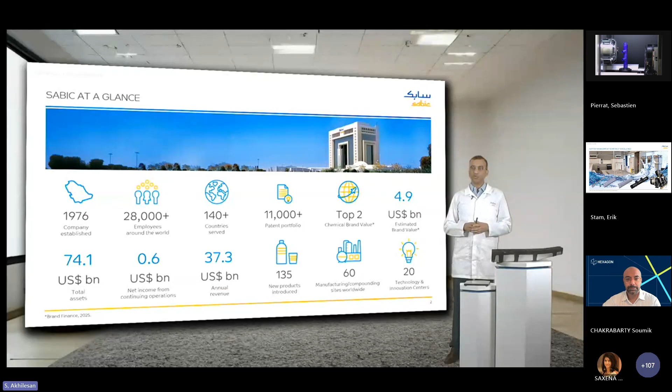Today, we are streaming live from 2 such technology and innovation centers in India and Netherlands.

In SABIC, we have 4 main business verticals: chemicals, polymers, specialties, and agri-nutrients. We are from the specialties vertical, where we deal with specialty engineered thermoplastics, specialty compounds, advanced composites, additive manufacturing, and thermosets and additives. In specialties, our key offerings include Ultem and Extem high-heat resins, Ultem sheet, Noryl resins, LNP compounds, as well as our extensive experience in application development and prototyping. The key industries that we serve include automotive, consumer products, electrical and electronics, as well as hygiene and healthcare.

Now, with this brief introduction, let's deep dive into today's technical topic. Today, we are going to talk about fiber-filled thermoplastics.

Fiber-filled thermoplastics are used widely in many applications in areas where the neat polymers cannot provide the required properties. This is achieved by having fillers such as glass fibers or carbon fibers to improve properties such as the structural stiffness and strength of the material.

Now, these materials are used widely in many applications, whether it's automotive, ignition coils, or maybe in the impeller for the water pump that you see at my hand here.

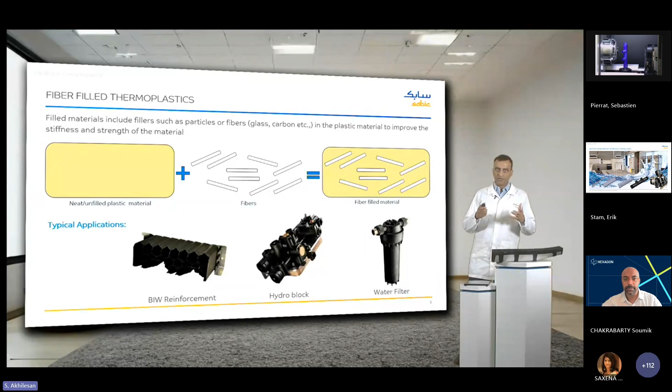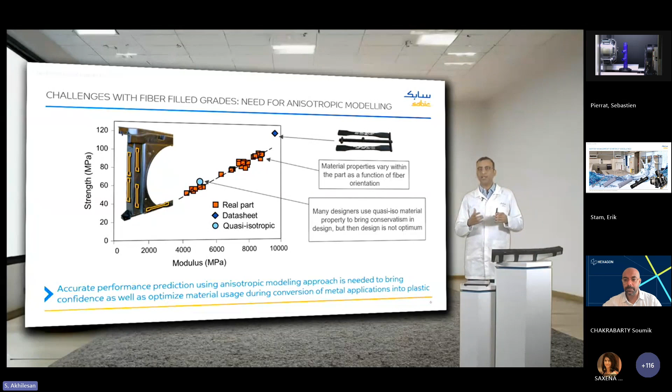So to avoid this scenario, what many designers in the industry do is use what we call the quasi-isotropic material property that is there in the blue circle. Now, this is a little better, that brings conservatism to the design, but then we are not really doing the optimal design. We are not taking care of the material that is there in our hand in an optimal fashion.

This can be explained a little better by this slide. What we show is that in this kind of applications and materials, if you are taking the technical datasheet value, for example for tensile scenarios, then you will be overestimating the stiffness or strength by 2x.

And similarly, for the fatigue case, the time to failure will be overestimated by 100 times, and the time to failure for creep will be overestimated by 400 times. So this really shows that we cannot use the technical datasheet values, they will be way off.

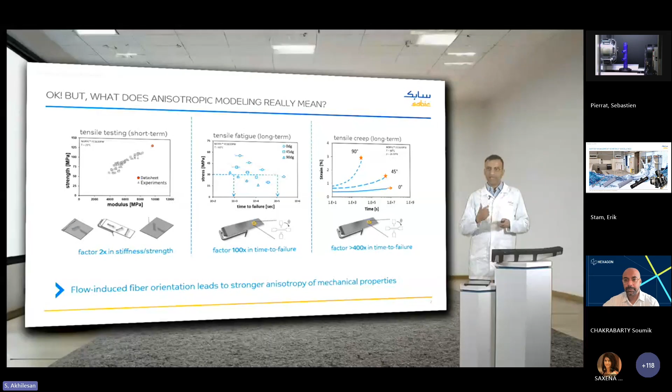And similarly, what I told in the last slide, if you use the quasi-isotropic properties, the design will not be optimal. So that really brings to the point that we should be using anisotropic simulation. Now, how do we use the anisotropic simulation?

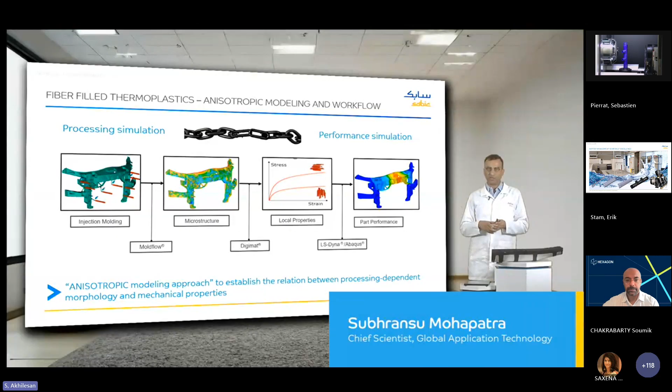In this case, it will require us to couple a processing simulation and then a performance simulation. The processing simulation, for example, if you are using injection molding as a process, then we have to carry out injection molding simulation using tools such as MoldFlow and MoldEx3D, where we can derive the microstructure such as fiber orientations.

And once we get the fiber orientations, then we can use the power of tools such as Digimat to assign the local properties at various points in the application. And once we have the local properties assigned, then we can do a full anisotropic simulation using tools such as LS-DYNA and Abaqus.

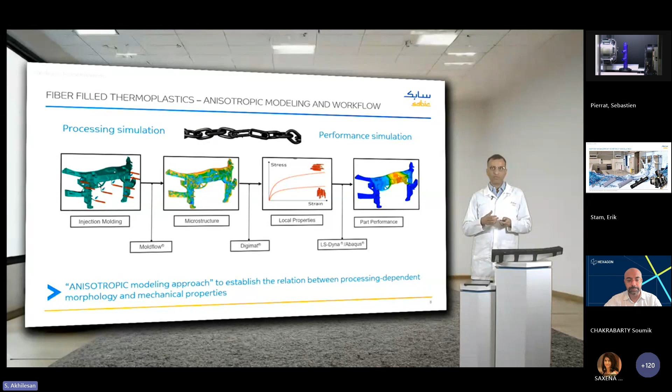And this simulation can actually be divided into 5 distinct steps, and that's how we are going to take our session today. As a first step, we have to do very extensive material testing and characterization, and that's what my colleague Vamsy from India will take you through.

And then it will require us to do a microstructure determination to know what are the fiber orientations in the actual part. And that's where the expertise from Sebastien, he will take us through that from Netherlands.

And then once we have that, we need to do the anisotropic modeling. And today, my colleague Prasad Dasappa from India, he will take this through for an advanced case of fatigue scenario.

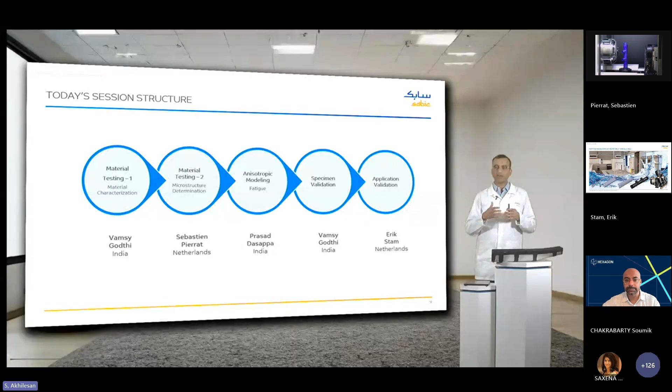And then once we have the detailed Digimat material card ready, we in SABIC go through an extensive range of validation. The first stage is specimen level validation, which Vamsy will take you through. Finally, we also do an application level validation, which our expert from Netherlands, Erik Stam, will take you through, to show how carefully and in depth we go to make sure the cards you get are trustworthy and accurate, and you can really rely on us. With this, I'll hand over to Vamsy to take you through the next section on material testing.

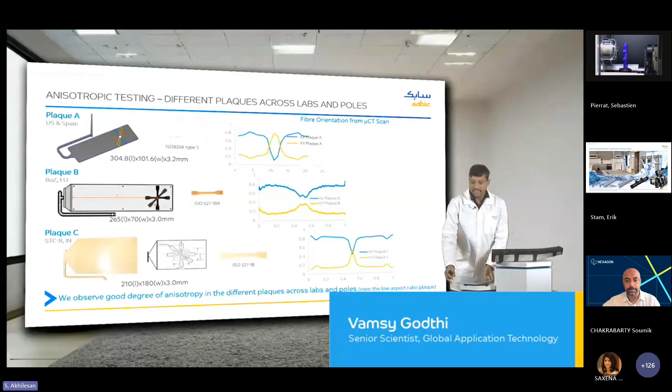Thank you, Subhranshu. Let's begin by looking at what it takes to characterize the anisotropic properties of fiber-filled thermoplastics. The process begins by injection molding a shear plaque. A shear plaque is a flat plaque, a 2D geometry with a gate at one end. We fill the part, and towards the end of the fill, we expect aligned fiber orientations in the direction of flow. This is the first step in the process.

There are different plaque geometries that different labs follow, as you can expect. You'll see different geometries shown on the screen. At SABIC, we make sure to study the anisotropy in any of these plaque geometries and ensure that at the locations where we cut the specimens and test the properties, the fiber alignment is well defined in the flow direction.

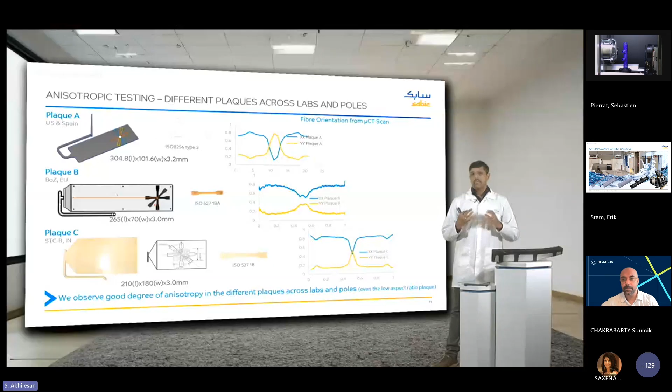That's the first step. Now let's take a look at the measures we need to take while carefully injection molding such shear plaques.

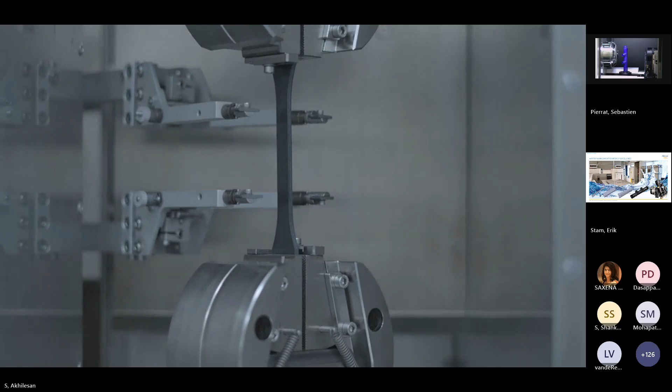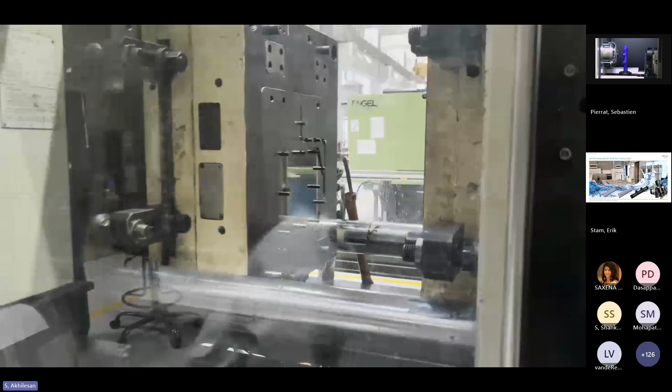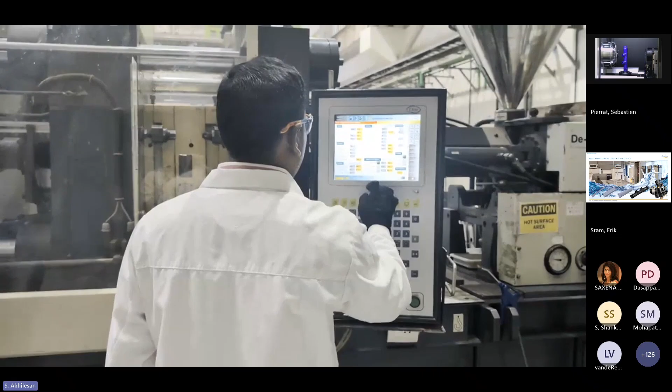This is our injection molding shear plaque, which uses a cold runner. Typically, for establishing good anisotropy in such a shear plaque, we need to fill it as slowly as possible. While setting the process parameters during injection molding, make sure to follow the recommendations set out on the TDS. Once injection molding is completed, make sure that across shot to shot there is consistency, and that the part is free of defects so we don't introduce any artifacts.

Once we have the plaque, we mill specimens out of it. These specimen geometries could be ISO type 3 or ISO type 1B, depending on the size of the plaque. We first degate the part and then mount it in our fixture. The process parameters for machining have been optimized to carefully reduce variability across tests, ensuring that you're only testing the material behavior and not artifacts from machining.

In this way, we machine or mill out specimens in three different directions typically: 0 degree, which is in the direction of flow; 90 degree, which is perpendicular to the flow; and at a 45 degree or 30 degree, depending on the test.

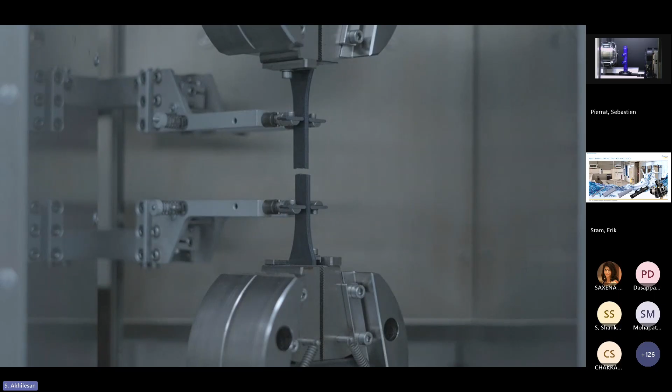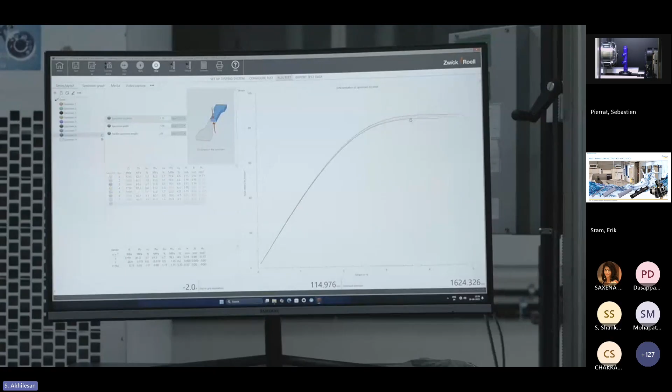Once we've machined these specimens, we take them to testing. Here we can see us carrying out tensile testing on our UTM. Typically, we make sure we capture the gauge length extension using an extensometer all the way till failure. And not only the stress versus strain, we also try to capture additional information such as the crosshead movement and the reaction forces experienced by the load cell.

With this, let's take a look at, apart from tensile testing, what else we need to characterize in order to fully understand the behavior of fiber-filled thermoplastics.

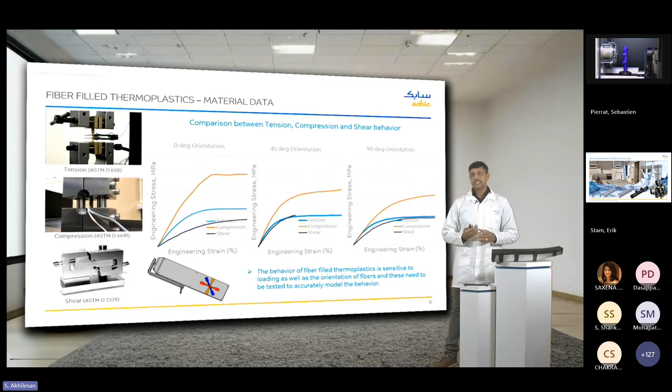Once you've done this careful investigation, we then move into more advanced sensitivities. One example is in the case of a drop or high-speed impact, where let's say you have a bumper cross-car beam or bumper beam reinforced with a thermoplastic material. When it's subjected to an impact load, different regions in the part experience different rates of loading.

The behavior of the material at different rates is different. You become stiffer and more brittle at higher strain rates, and this is again a function of fiber orientation. So at least at 3 different orientations and 5 to 6 different strain rates, we need to characterize this behavior, and we do it for some of our high promoted grades.

Apart from this, you also need to consider the environment at which these components are going to be used in. If the temperature is varying, it could be subjected to -30 operating temperature or even +80 or any other temperature, then you need to also test all of these tests at those temperatures as well. So this is the kind of detailed data that you would need to fully characterize and understand the behavior of fiber filled polymers before we go into the next step.

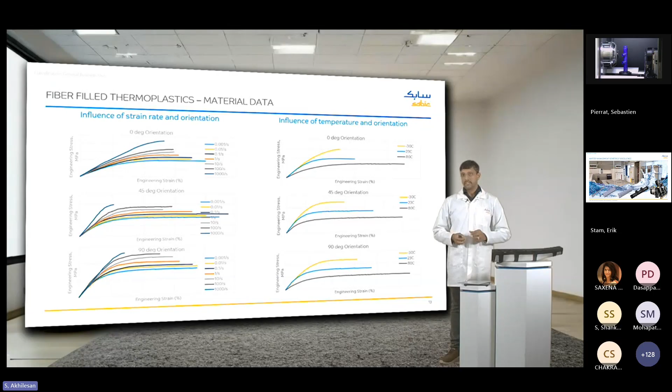Now, before I hand it over to Sebastien to take us through the microstructure and how he characterizes it, let me take you through a few other sensitivities that at SABIC we carefully consider.

One such sensitivity is, say for instance, I have a test campaign where I did 10 different tests and used 600 plaques or 500 plaques to finish testing. 1 year later, a customer requests another different condition to be tested. So we need to again injection mold and go through this whole process that I showed. Now, how are we confident that the anisotropy in the part is the same? We carefully characterized the microstructure of plaques molded years apart, and we find them to be consistent in their anisotropy as long as the process conditions remain same.

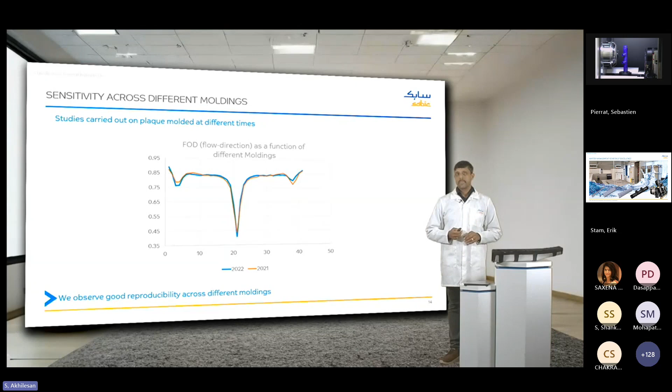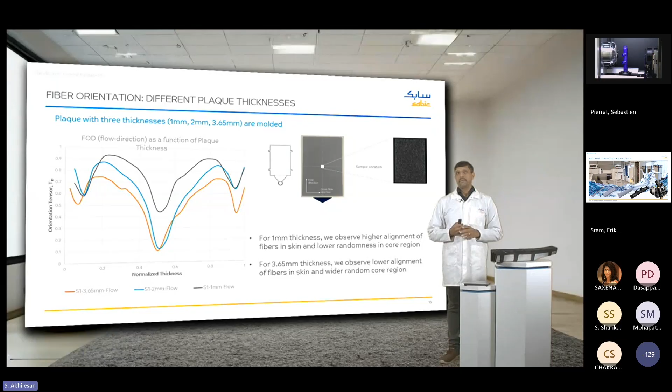With this brief background and our testing methodology, I'll hand it over to Sebastien, who will take us through computed tomography techniques to characterize the microstructure at these parts.

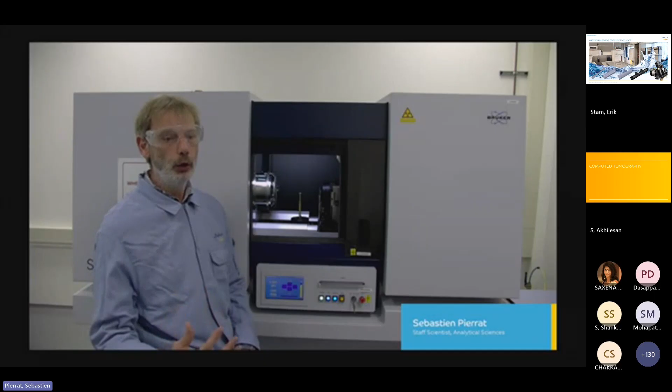Thank you very much, Vamsi. Computed tomography is an imaging technique which allows acquiring images in 3D and therefore characterizing and determining the internal structure of samples. As such, it is perfectly suited for the characterization of fiber orientation. 2D techniques can be used to characterize the orientation of fibers, but they give approximated results. Ideally, to provide accurate quantitative data, computed tomography is extremely suitable.

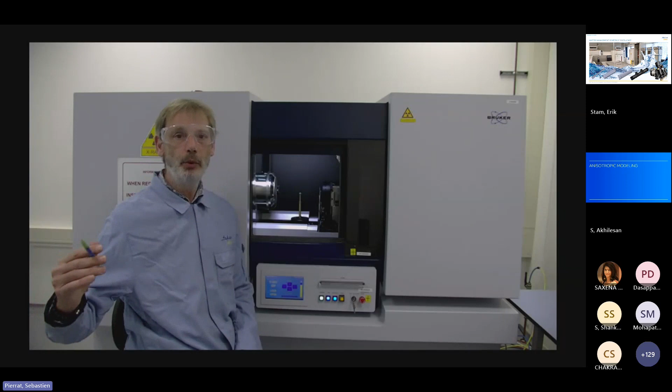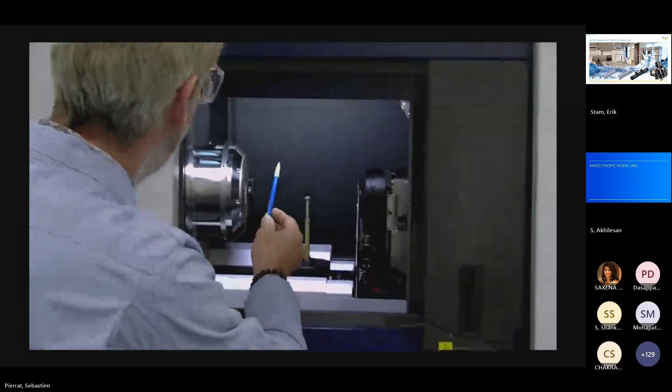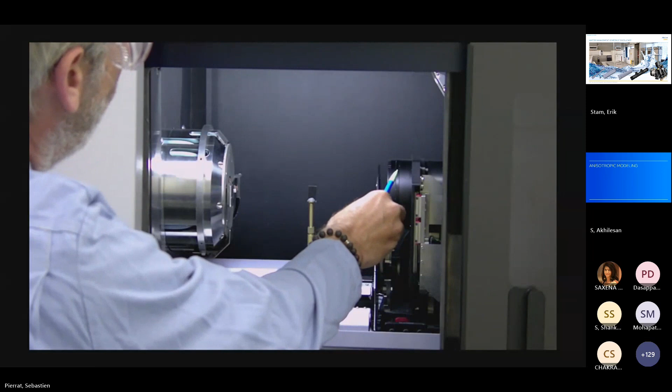Computed tomography consists of two work streams: first, the image acquisition, and second, some computing to reconstruct the volumetric information. The image acquisition is performed with an X-ray scanner. It contains an X-ray source, which is focused on the collimator to create a cone-shaped beam, which then irradiates the sample, and the image is acquired with a detector located at the opposite of the source compared to the sample.

The contrast which is generated is therefore depending on the attenuation of the X-ray inside the material, and the attenuation is stronger as the material is heavier. Glass fibers have a much higher density as compared to polymer. They will attenuate much more strongly the X-ray and then create a contrast.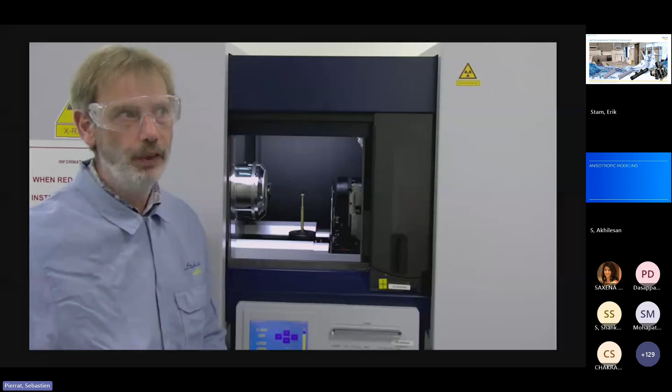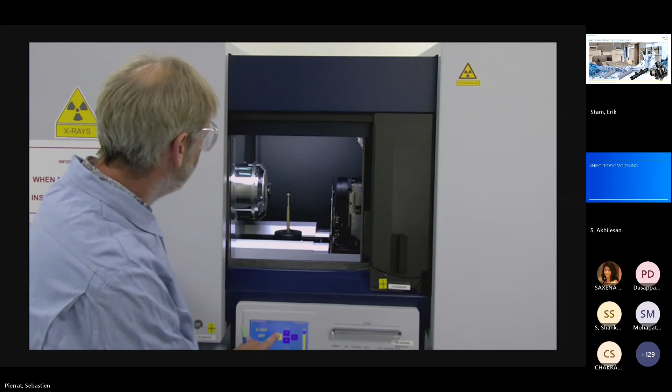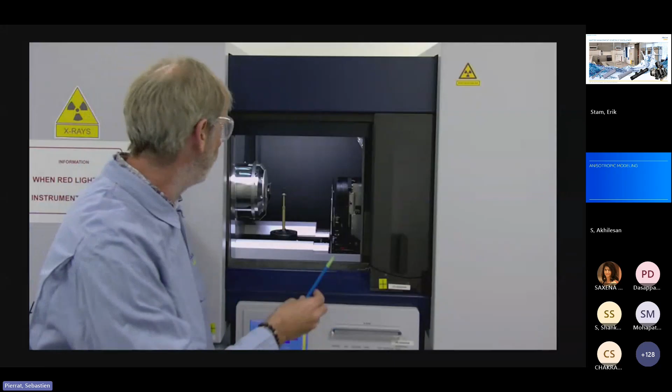Another component of the system is a filter wheel. This allows us to adjust the energy of the X-ray and optimize the contrast. We're going to use different energy if we want to image glass fiber in a polymer or carbon fiber in a polymer. Another important parameter is the resolution. In the system we have, the resolution can be adjusted by changing the distance between the source and the sample, which is going to bring some constraint on the sample size. For glass fiber, typically, I'm using a resolution of 3 micrometers, and this is typically the size of the sample that I'm using. I will now show you a bit more on the image acquisition itself.

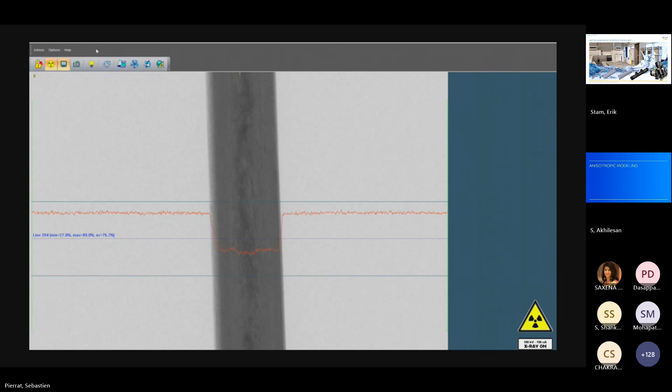In order to reconstruct the sample and get the third dimension in the analysis, we are imaging the sample at different angles and capturing different projections at different positions. This is typically a scan which is performed. The sample is rotated, and we have the third dimension information on those projections, and therefore we can provide volumetric three-dimensional information.

Such an image is not really comprehensive, so we have additional steps to reconstruct the third dimension and generate a data set which consists of a slice of XY horizontal plane, and the vertical direction is given by different frames. This is an example of a reconstructed data.

The bright spot corresponds to the individual glass fiber, and we can see already that they present different orientations in the core of the sample as compared to the surface of the sample. This can be further quantitatively characterized to support the engineering team and provide some data points to validate the simulation.

Using a 3D image analysis software, I can detect the individual fibers and track the center line of each of the fiber along the length, as well as measure the local orientation of the fiber.

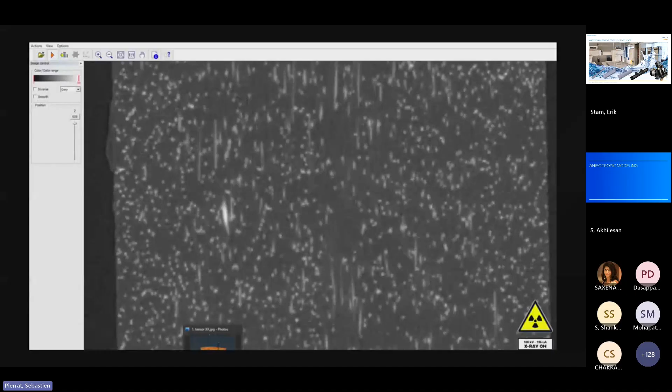This can be represented in 3D in a color-coded image where red color shows strong orientation, blue color low orientation. We can clearly see on this image that the fibers are strongly oriented along the flow close to the surface, whereas they are oriented perpendicular or more perpendicular to the flow in the core of the material.

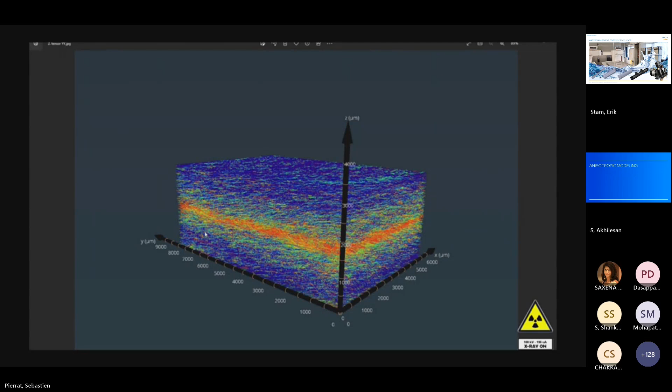The local orientation of each individual fiber is not extremely useful as an input for the predictive engineering. In order to provide some representative data, I average the local orientation of each fiber on different slices and provide the average orientation of the fiber along the thickness of the sample. This is then used for the simulation, and Prasad will walk through the fatigue modeling.

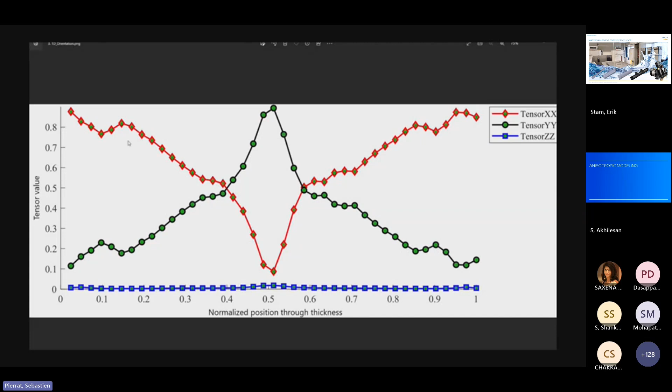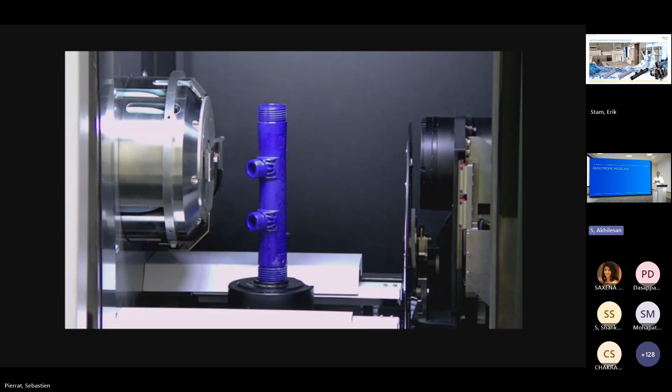Thanks, Sebastien, for that demonstration on CT scanning. Over the next 5 minutes or so, I will take you through some of the anisotropic models, specifically the fatigue aspects of fiber-filled materials. Now, first of all, what is fatigue?

Fatigue is the reduction in the material properties when it is subjected to fluctuating or cyclic stresses. Typically, to obtain data for design and simulations, we perform fatigue tests such as this on dog bone shaped specimens, applying cyclic loads to obtain the fatigue data.

Data is typically generated at an R ratio of 0.1 and a frequency of about 5 Hertz. The final outcome of this test is basically the stress versus cycles to failure, as shown in the graph here.

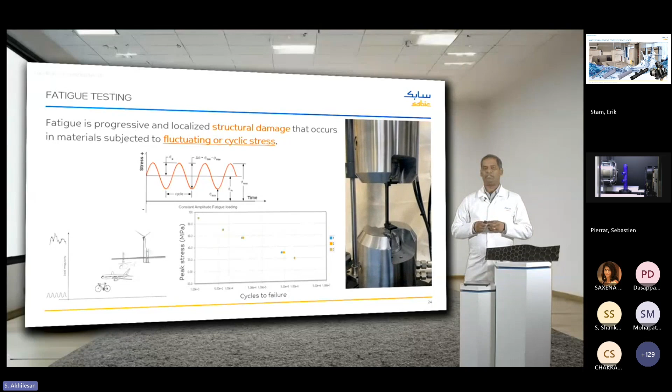Now let's take a look at why anisotropy is very important when it comes to fatigue in fiber-filled materials. Shown here is a graph of fatigue data for specimens that have been cut from plaques in 3 different directions: 0, 45, and 90. As with the tensile bars, we see that the fatigue properties in the 0-degree orientation provide the highest performance, while that at 90-degree orientation provides the lowest performance.

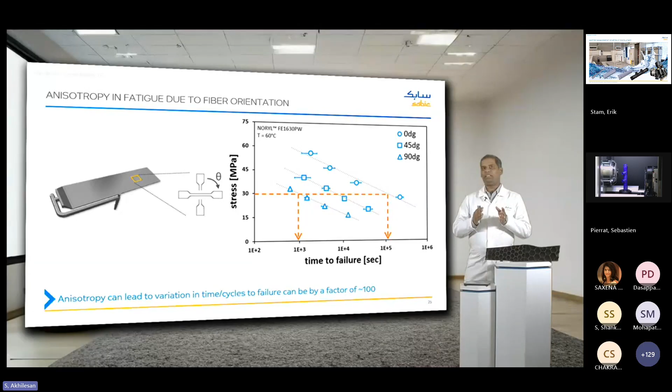For example, let's take 30 MPa as marked in the graph here. At 30 MPa, the cycles to failure at 90-degree orientation is about 1,000, while that at the 0-degree orientation is about 100,000. So for this particular material, the variation is about a factor of 100 when orientation is accounted for. Hence, considering anisotropy in the fatigue models is very, very important.

At our labs in Bangalore, we follow the ASTM D7791 standard to perform our fatigue tests. We start the fatigue test at around 60 to 70% of the ultimate stress, and for each condition, we perform tests at at least 4 stress levels. At each of these 4 stress levels, we conduct 3 repeats to get an idea of the variability in the data. We typically try to hit 1 million cycles to failure.

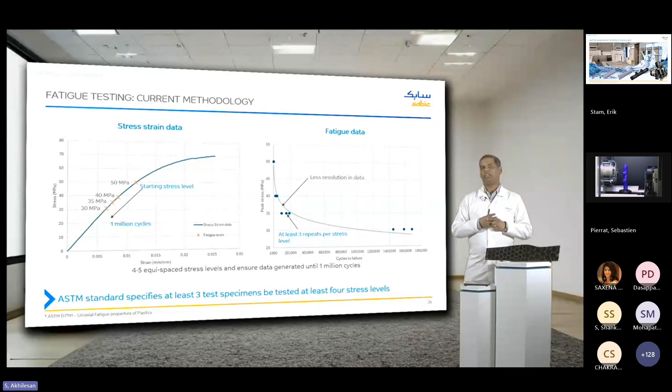The outcome of this test is shown in the graph here. This characterization is good for general characterization of the fatigue properties of a material. As you can see, the data points are quite coarse, and this results in inaccuracies during modeling. Hence, we have been looking at an alternate marching method.

This is based on the suggestion from Hexagon, where we conduct fatigue tests at equispaced cycles to failure or equispaced stresses until we hit 1 million cycles.

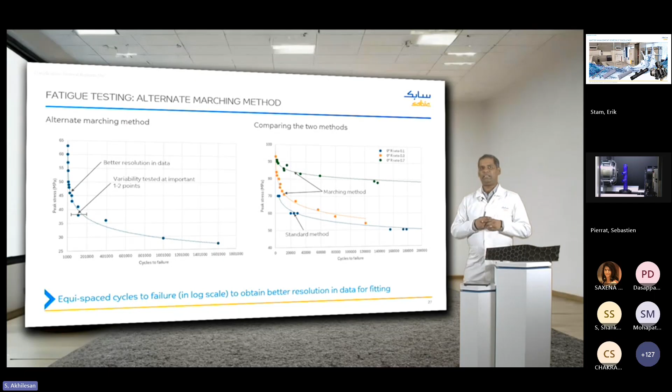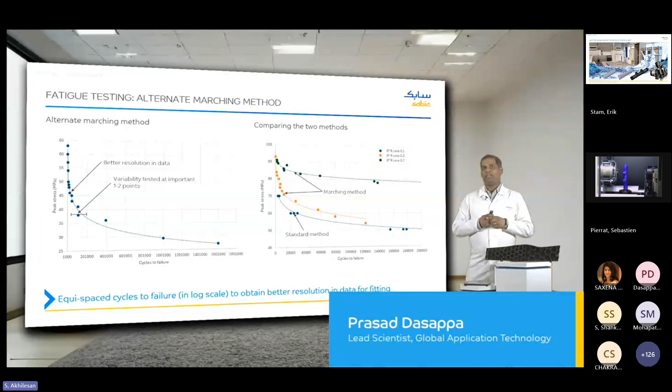Here the principle is, instead of the repeats, we perform tests at finer increments of stresses or cycles to failure. The result is, as you can see here, better resolution in the data and hence better fits to the data. Along with that, in order to obtain an idea of the variability in the data, we perform repeats at 1 or 2 stress levels. So overall, this method helps us get better resolution data and better models.

Now that you have seen how to obtain the test data, let's take a look at the models.

Once we perform the tensile tests as explained by Vamshi and the microscopy information as explained by Sebastien, we can combine these two data in Digimat MX to obtain elastic plastic material cards. You can add additional effects such as temperature and strain rate by performing additional tests on the tensile test, so you get elastic plastic, thermoelastoplastic, viscoelastic, or viscoplastic material cards depending on the type of test performed.

In order to capture fatigue, you have to capture at least fatigue data at 3 orientations, just like with the tensile orientation: 0, 45, and 90. In order to further improve the accuracy of the model, you could perform additional tests at various R ratios to capture mean stress sensitivity in the model. This results in better quality fatigue data.

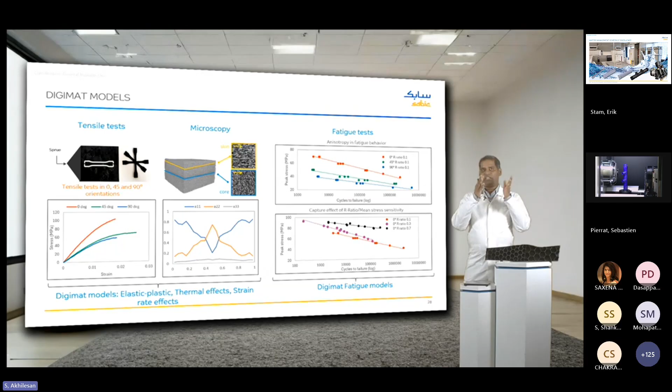So now that you have looked at both generating the data and fitting them into the models, let's take a look at some of the models that are available for SABIC materials.

Here is a list of all the materials that we have. Shown in blue are the ones that have been added in 2023 and hence will only be available after Digimat 2023. For most of these grades, we have the thermoelastoplastic material models available.

Along with this, we have also been working on generating additional creep and fatigue data for many of these grades, and it should be available soon.

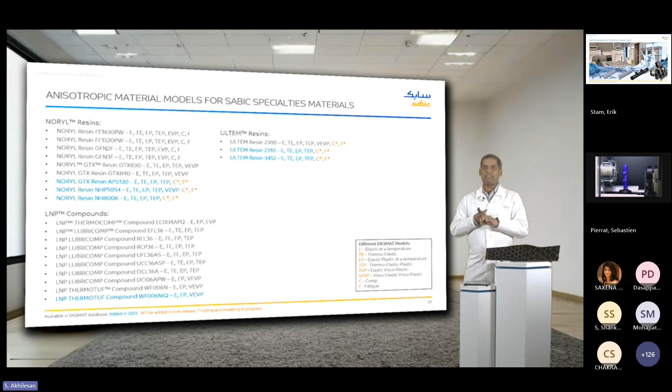So now that we have seen the testing, the modeling, and what data is available for SABIC's materials, Vamsy will take you through some of the specimen level validations that we perform before the models are provided to you. Over to you, Vamsy.

Thank you, Prasad. With this, we got an idea of all the data generation techniques that we follow, as well as the modeling efforts. Now, before we give these models to you, in order to enhance the trust in these material models, we go the extra mile.

We also perform validations. As Subhanshu explained, there are a couple of steps involved in the whole anisotropic modeling workflow. If you recall, the first step in the modeling is to predict fiber orientations in the real world parts. Before we jump and do that on real parts, we need to calibrate these fiber orientation prediction models built into processing tools such as MoldFlow or Moldex3D, so that for the given material, the prediction is accurate. And how do we do this?

We take the same plaque that you saw that we injection molded. We take the same parameters that we used to injection mold this plaque and replicate this whole scenario, including the mold design, in our processing tool. When we have done all of this, we then predict a fiber orientation.

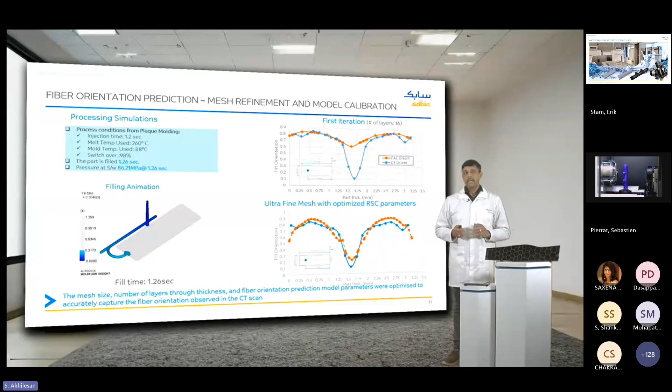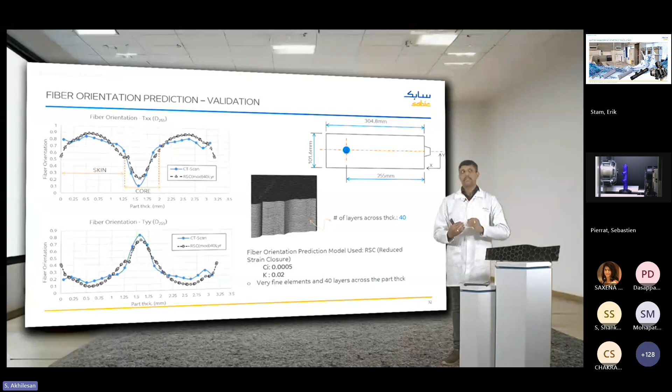Apart from this, we also look at sensitivities that come from the meshing itself. What we have observed is you need to have a sufficiently fine mesh in order to capture the skin-core effect, and also a sufficient number of layers through the thickness to accurately predict the randomness that comes in the core part, in the center part.

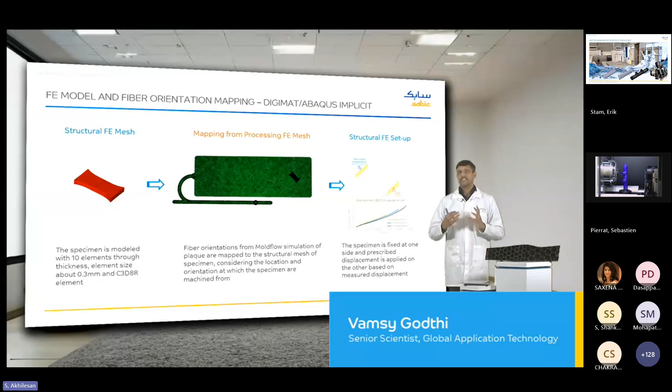Once we have done this, we go to the next step, which is the structural validation. We have done tensile testing with a certain specimen geometry. We take the same specimen geometry and use a structured mapped mesh in an FE solver to create a structural FE mesh. Using tools such as Digimat Map, we can then align the fibers in the specimen in the same orientation as in the real part, similar to how we have cut them.

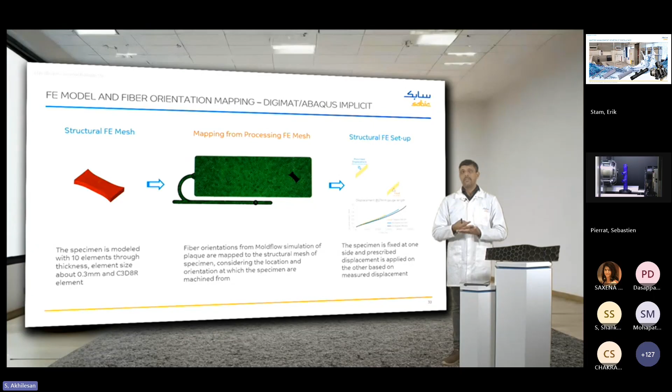We do it at 0 degree, 45 degree, and 90 degree. We create the same orientations in this mapping and map the fiber orientation from the structural mesh, from the Moldflow simulation mesh, to the structural mesh. Now this mapping is completed, and you have the fiber orientations in the specimen geometry.

Then we apply the structural boundary conditions. In the structural boundary conditions, there are two things we do: one, we constrain one side of the specimen, and on the other side, we apply prescribed displacement.

This prescribed displacement is similar to the way we perform the test. So we take either the cross-head movement extracted from the machine when doing this test and input it in the solver, or we use a virtual extensometer to measure the end of radii displacements and input it in the solver.

Once we do this, we measure a couple of outputs. We measure the reaction force, and we also characterize the strain occurring at node sets at the end of the parallel region, which is the gauge region. These are compared against experimentally extracted results.

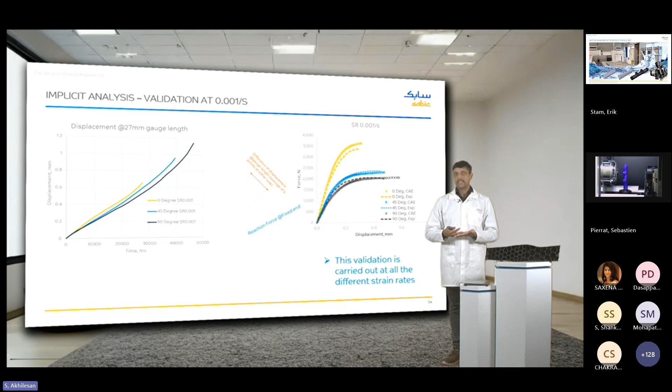We do this not just at one condition, but at all the conditions at which we create these Digimat models. In the case you see here, this is the implicit validation done in Abaqus implicit solver for 6 different strain rates. We see that all of these models accurately, or fairly accurately, predict what we observed experimentally, with a little bit higher variation at higher strain rates, which is expected.

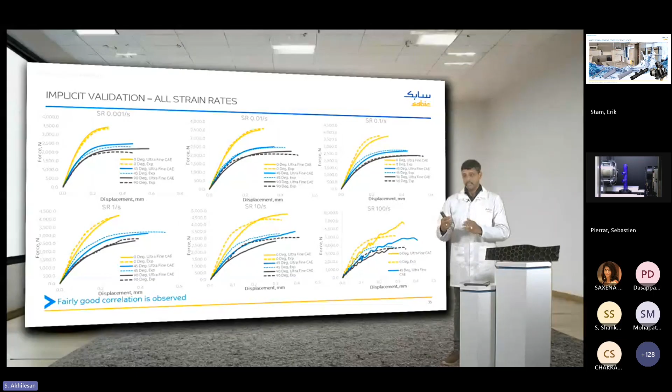Now that we've gained confidence that at a coupon or specimen level we are establishing good correlation between the models and the experiments, we will move on to the next level: the experiment application level validation from Erik.

Over to you, Erik. Thank you, Vamsi, and welcome to the SABIC Water Management Center of Excellence in the Netherlands. In this laboratory, we can perform various validations on various samples, internal samples, and of course on the application itself.

We do the validation on the application because we want to determine whether the performance of the end application is in line with the predictions we have made before.

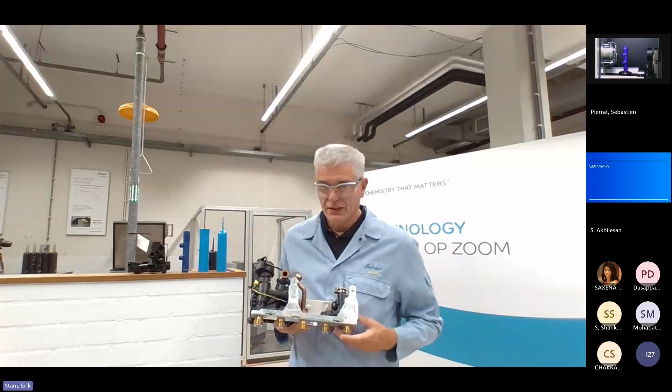Let's show one of a typical application used in water management. This is called a hydro block, which is part of a central heating system. It consists of 2 flow blocks, and I will show you one flow block now.

You can see that's a very complex part. This part is injected from one side, which means the fibers are oriented in all different directions. And because it's in a hollow shape with channels, you will have various weld lines at different locations, and this all together determines the performance of the application.

So that's what we need to validate here. But of course, we also have internal samples which mimic part of what we see in the real application. So let's have a look at that.

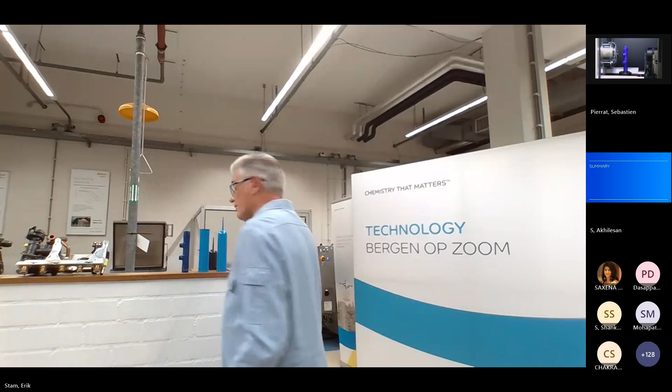First, if you look at the tensile bar with glass reinforced materials, you know that if you inject it, the fibers are oriented nicely in this direction. If you then do a tensile test, you get the optimal strength. But in the real application, the fibers will be in different directions, not always in this direction.

Also with this test, you will have only uniaxial stresses, which is also not the case in the real application. For that purpose, we have different samples in-house.

The first one I want to show you is a top-gated pressure vessel. Again, it's injection molded from this side, so the fibers are oriented nicely in this direction. If you then fill this with water and pressurize it, the stresses are perpendicular to the orientation of the fibers, which means you do not get the optimal strength as seen in the tensile bar. It will be much lower, and that's something you also see in the application.

What we also have is a pressure vessel which is injection molded from the side. We do this because it generates a weld line, which is a weak spot in many cases for materials in the application. But in this case, because we mold it from the side, the fibers are oriented more in a favorable direction, giving more strength compared to the top-gated sample.

Last but not least, we have internally a solid-state water meter body, and with this we try to close the gap to what we see in the real application. It's injected from the side, and on the other side you have weld lines, actually 3 in total, with fibers also in different directions. Now let's have a look at the validation test we perform in this lab.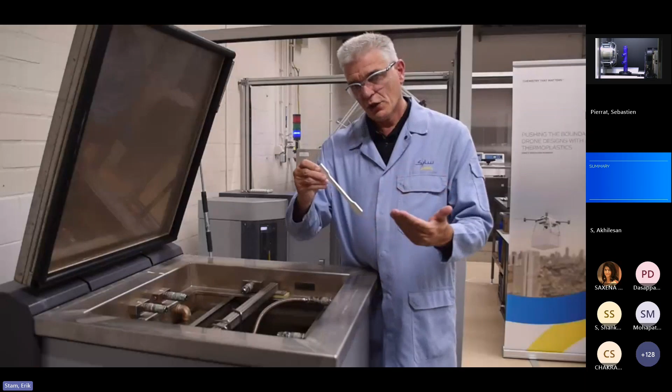The first thing we do is look at the hydrolytic stability of materials. For that, we use tensile bars. We expose them in hot water for 1 or 2 years, and then we determine whether the material can withstand the water. It sounds very simple, but there are a lot of materials which cannot withstand hot water over a long period of time. Only those materials which are good candidates, which can resist water for a long time, we continue with more advanced testing.

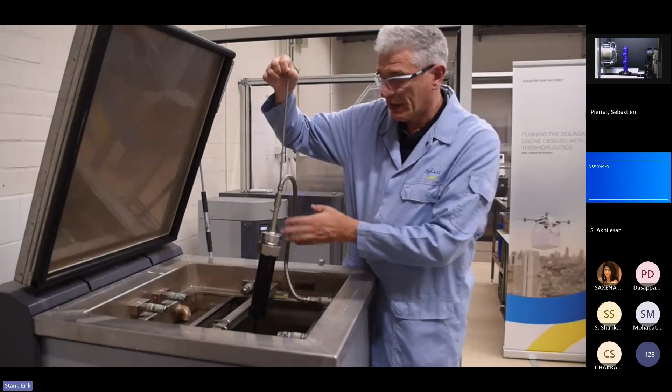The first test we do on the application, or an example I will show you, is an internal sample for a burst test. In this case, burst test means you connect this to a water system. Inside is filled, and you increase the pressure with a constant pressure ramp rate until the material or sample fails. This can be a sample, but it can also be an application. We will now see a high-speed video of a sample which is Noryl glass reinforced material.

It's nice to understand the burst pressure, but it only gives you information about the short-term strength of the material or application. You have peak stress in your system, but it doesn't give you the answer for long-term performance. So many of our customers require fatigue testing, and the problem is that each customer has different ideas and different settings or parameters to perform the fatigue testing.

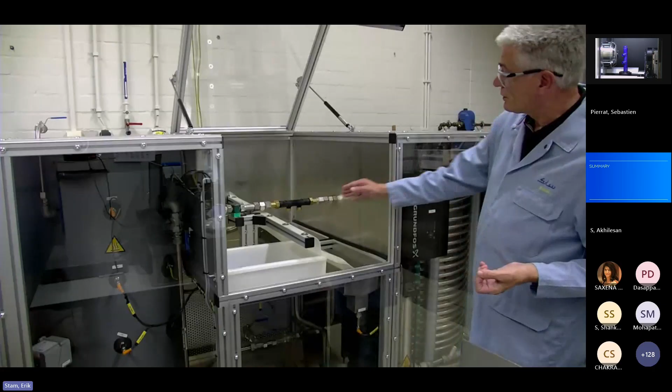At the moment I'm standing at the water hammer test. This test involves a large coil which generates a large volume of water. This water flows through the sample here, and at one moment the water comes to a sudden standstill. There's a valve which closes, and due to the closure of the valve this generates a peak of 16 to 25 bar, repeated over time. Some customers require passing 100,000 cycles, and then the application fulfills the requirements set by the customer.

But this is just one type of fatigue test. There are more fatigue tests, and I will show you the next one.

Here we are at the setup where we can test pressure vessels or solid state water meters against a sinus pressure over time, or a block wave pressure. These are also fatigue tests required by our customers, and we can put different settings here for the upper and lower pressure. We have 25 samples at the same time connected to a pressure system which generates the sinus or block wave pressure. Once the material or application fails, it will stop only that sample which failed, while all others continue in the test. In this way we can run 25 samples simultaneously without interruption.

So this is about fatigue testing, but it's also very important to understand the constant pressure resistance. For that, I will move to the next setup.

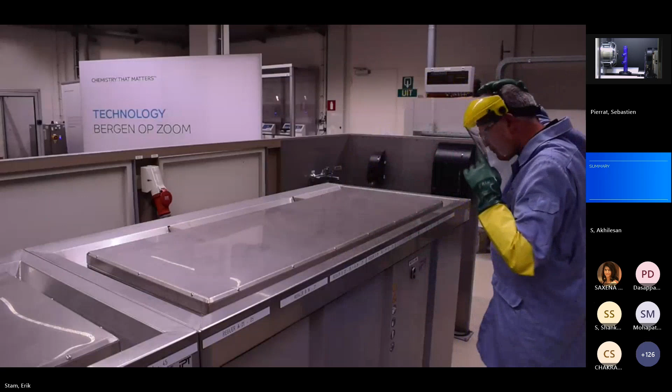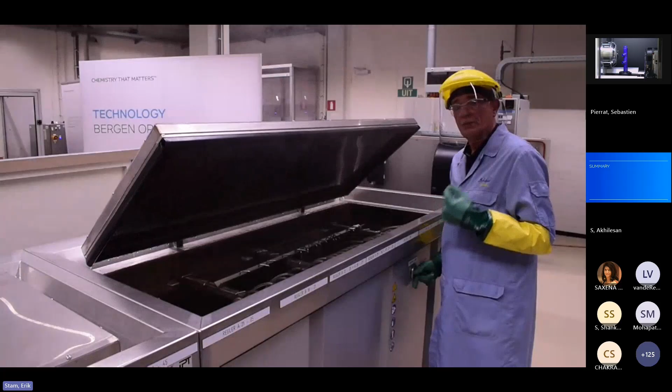Constant pressure resistance is often called creep rupture or long-term hydrostatic strength. This involves exposing the inside of an application or pressure vessel to a constant water pressure, and continuing until the material or application fails due to a phenomenon called creep rupture. I will show you one sample.

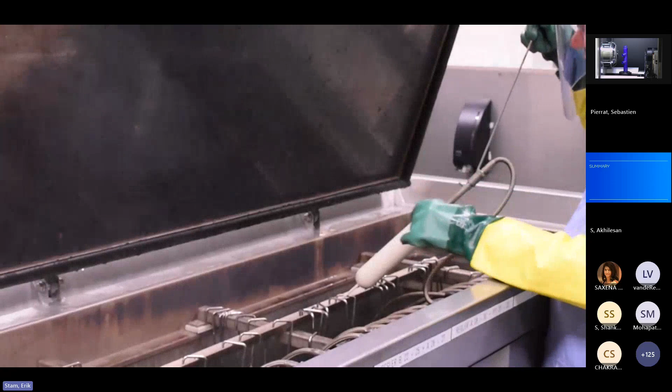The water bath is used as a medium for the temperature. You can see a sample here. What happens is that you put a constant pressure on it, and at one moment it fails, and the failure mechanism is called creep rupture. The failure mode also changes from ductile failure in the beginning, and if you continue for a longer time at lower stress levels, it comes to a slow crack growth. In the end, if the material starts to degrade, you speak about degradation mode. But that last phase you never want to be in, because that means your material would not be suitable for water applications.

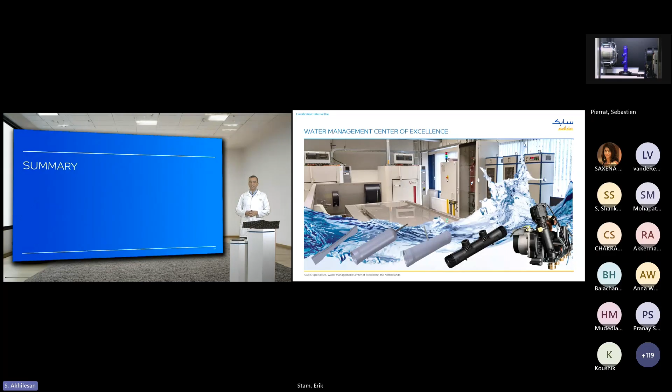Thank you, Erik and team. So you saw how much detail and depth we at SABIC go to characterize the materials, to generate the cards, and then to validate these cards, not only at the specimen level, but also at the application level with our Water Management Center of Excellence in Netherlands.

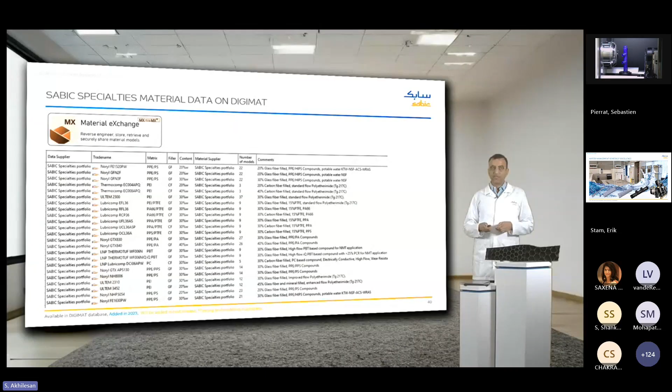Now the big question is how you, our customers, can get access to these cards. The first way is through the Digimat material library, where you can see all the materials and cards that we have. The second way is through the material finder that we have in SABIC. Let me take a couple of minutes to talk about it.

SABIC Material Finder is our one-stop shop for all of you, our customers, to find the right material for your applications. You can get access to this through our sabic.com website or by simply searching for SABIC Material Finder in Google. This portal allows you to quickly search and compare, evaluate our different material options in our portfolio. You can use many easy-to-use search filters - by features, by industry, properties, even sustainability options, and also by free text.

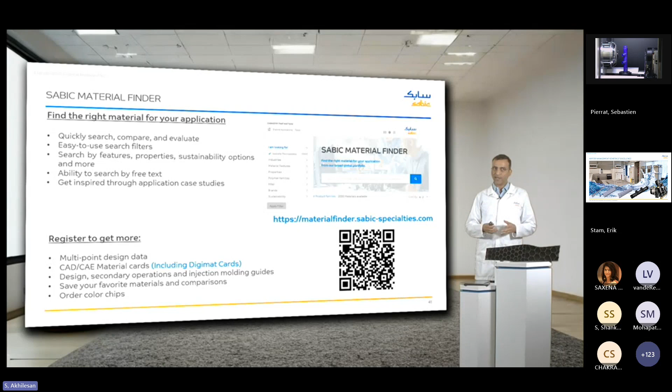We have a lot of case studies where you can get to know how our materials can help you in your application design. You need to register on this website to get access to the Digimat cards we just talked about. Registration not only gives you access to these validated material cards, but also helps you in other ways - you can select materials and make them favorites, so you don't need to search for them again and again. You can also get the ability to contact us in a much easier way.

And with that, we come to the end of our presentation, our session today. We are very much excited to collaborate with all of you, our esteemed customers. We will keep this QR code for a few seconds so that you can get access to the Material Finder and can register. So with that, we come to the end of the session, and I'll hand it back to Soumik. Soumik, back to you.

Thank you, Subhranshu, for wrapping up your session with such valuable insights on material availability in SABIC Material Finder. A big thank you to all our presenters - Subhranshu, Vamshi, Prasad, Sebastien, and Erik - for sharing all your expertise and taking us through this comprehensive deep dive and unlocking superior predictability with validated Digimat cards. Your contributions have really illuminated great potential for these materials and applications across all industries, specifically in electronics, mobility, and infrastructure.

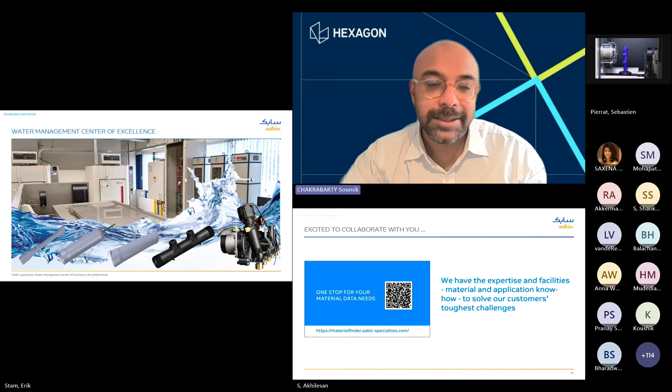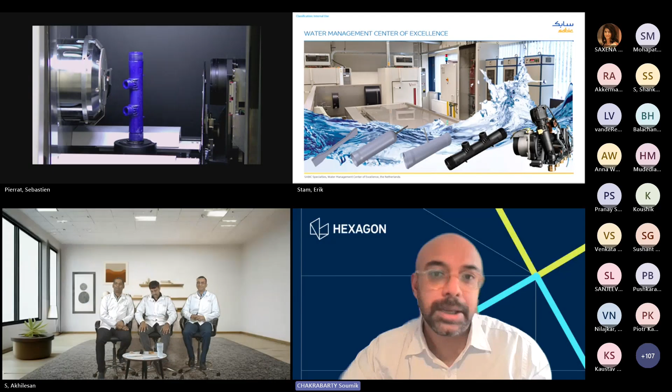I'm sure you all can appreciate the level of effort and expertise that goes into the validation of high quality material cards. This session was to instill confidence in using material cards calibrated by the expert team behind that is there in SABIC, and use them for your simulations. Feel free to contact the SABIC team for any support that you need. For people who already know me, you know my coordinates - please feel free to contact me if you have any further questions, doubts, or comments. For the ever so talented team here, please let me know.

We are now ready to transition into our Q&A session, where we are going to address your questions. We have received some fantastic submissions, and I think our panel is eager to dive in. If you have any additional questions about filled grades, material validations, or specific applications in your industry, please submit them via the Q&A chat now - it will keep coming in. We're trying to do our best to cover as many as possible. But before we start, a quick reminder, this webinar is recorded and we will be sharing the recordings very soon on demand.

Now I think we are ready to get to your questions. Here is your first one. Why is the tensile strength and Young's modulus values not matching with the 0-degree test data from the technical data sheet? What could be the reason? I'm not really sure which slide this is referring to, but Vamshi, I think this is yours - if you can address this.

Thanks, Soumik. That's a very good question. As you can imagine, when you injection mold a tensile specimen directly, you can establish that the fiber orientations get really well aligned. Whereas in a shear plaque, it is a much wider width of flow, so you do not expect such good alignment of fibers. Also, the processing conditions vary - the shear experience does vary. So our experience has been that in directly injection molded tensile specimens, you get much higher alignment than even the 0-degree cut specimens. In real world scenarios, if you were to really look at it, I would say 0-degree is your best performance measure, and 90-degree would be your worst performance measure for tensile behavior. And directly injection molded is even overestimating it compared to what is possible in the real world. That's how I would put it. I hope that answered the question.